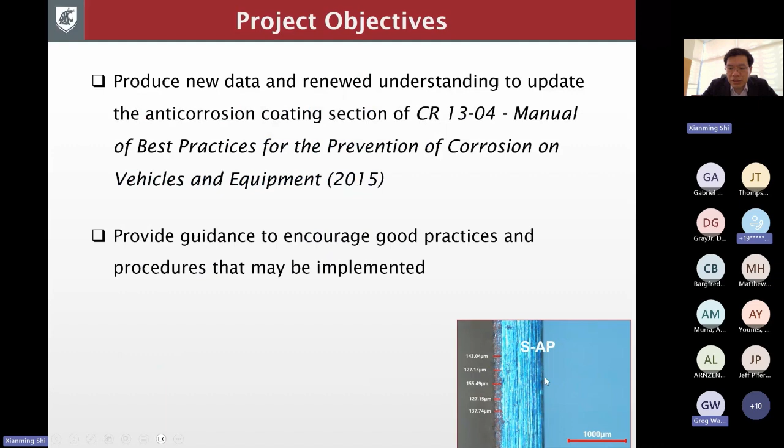Just to refresh our memory why we want to do this project, the project objectives are twofold. First, to produce new data and renewed understanding to update the anti-corrosion coating section of the previously completed project back in 2015, titled Manual of Best Practices for the Prevention of Corrosion on Vehicles and Equipment. The second objective is to provide guidance to encourage good practices and procedures that may be implemented by highway agencies. Here I show an optical photo of a coating, which is a sacrificial anode or zinc-rich coating, under the microscope.

This project has five tasks. Task 1 is survey and market analysis. To begin with, we conducted an online survey of Clear Roads member states so that we can capture practitioner insights and collect more detailed information, such as the use of current deicers, off-market anti-corrosion coatings being used, the typical metals in DOT equipment, and so on and so forth.

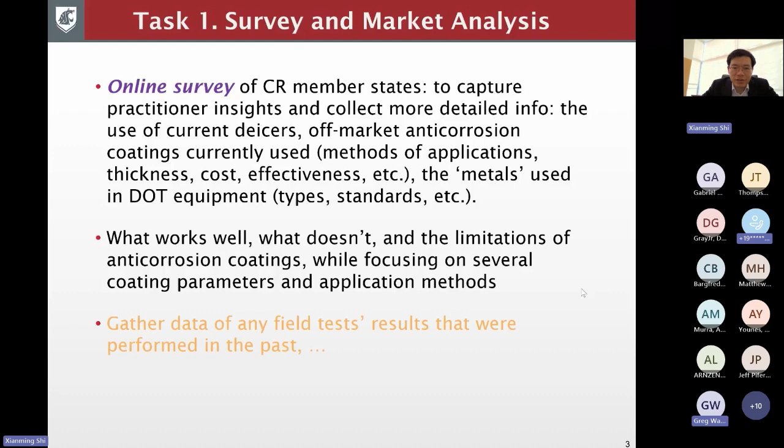We certainly want to learn what works well, what doesn't, and the limitations of such anti-corrosion coatings, with a focus on several coating parameters and application methods. Also, we intend to collect data of any sort of field test results, even though there's very little out there.

As part of Task 1, Task 1A is the survey, and we were able to obtain 23 complete responses. As you can see from the map, the location of these responding agencies is pretty diverse.

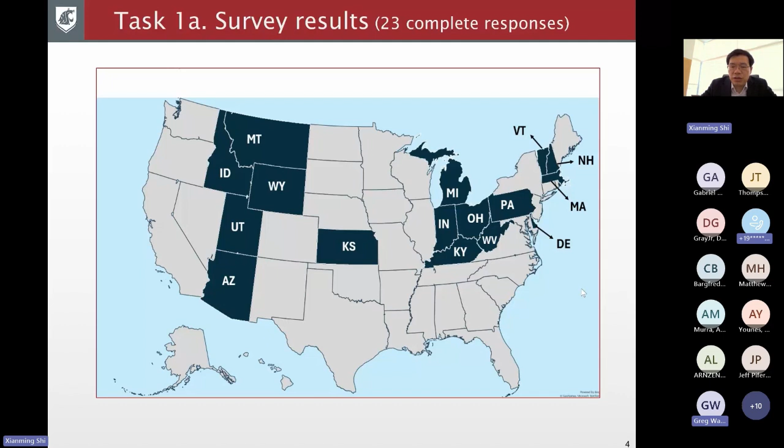From the survey results, you can see that we have a diverse group of responding agencies in terms of climate conditions, and pretty much everybody's doing anti-icing, de-icing, direct liquid application, and a little bit of sanding.

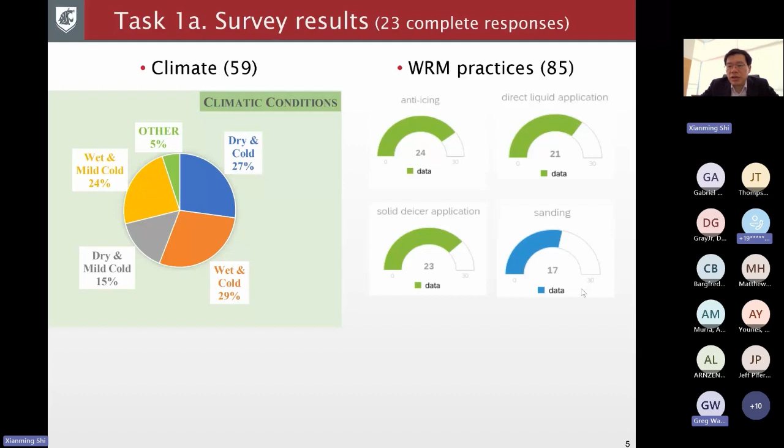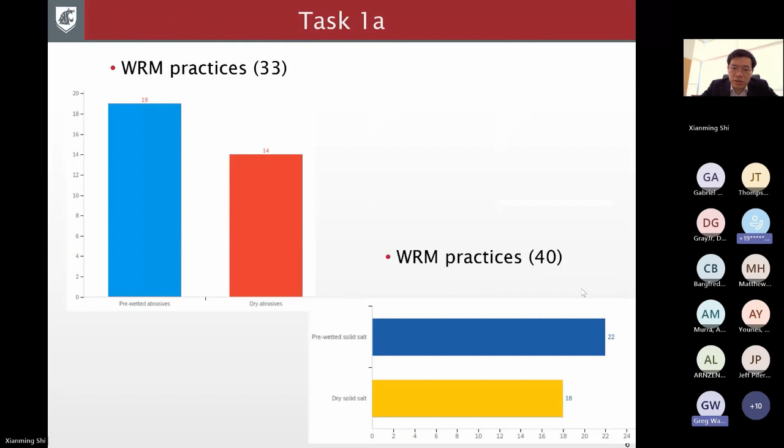Looking at winter road maintenance practices, there's sanding using pre-wetted abrasives versus dry, and salting or de-icing using pre-wetted salt and dry salt.

We also asked questions related to the use of corrosion inhibitors in these products. It turns out most agencies do use corrosion inhibitors in one way or another, and they mainly use beet juice and also inhibitors included with magnesium chloride deicers.

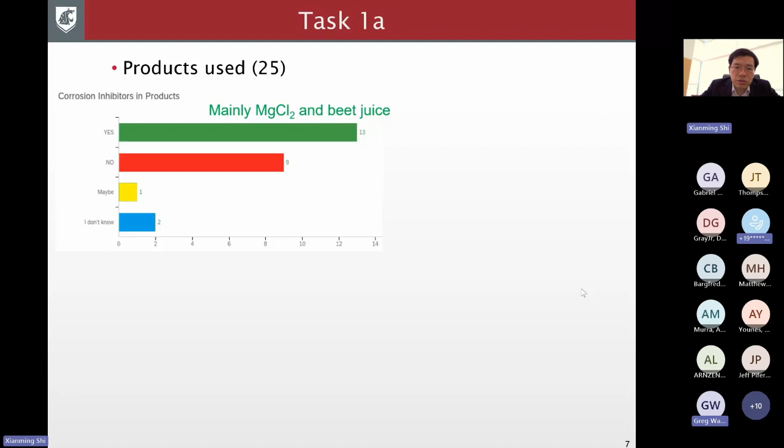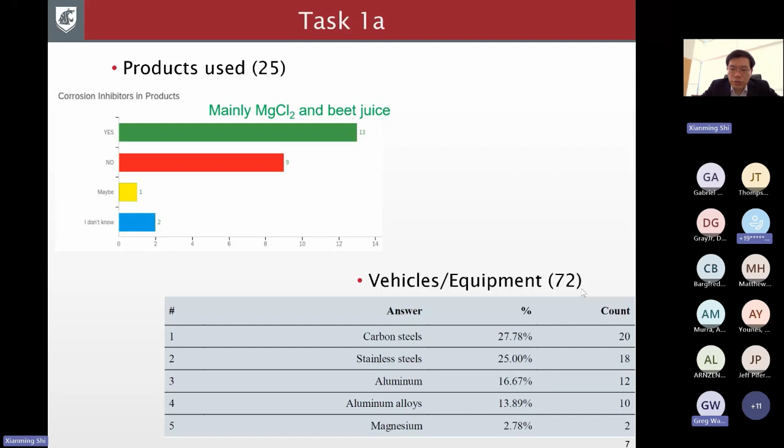We also looked at the type of metals typically seen in DOT equipment and vehicles. As you can see, carbon steels, stainless steels, and aluminum alloys are the more commonly used metals or alloys.

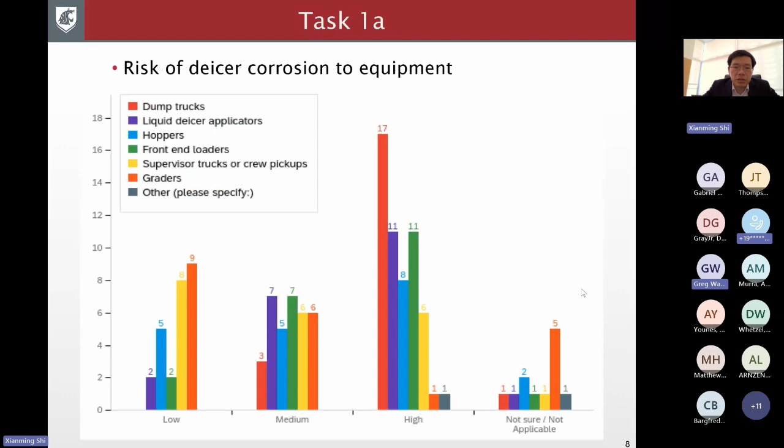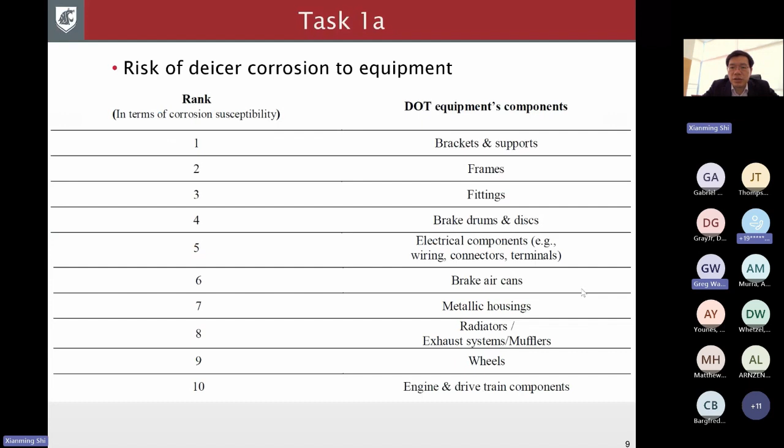Now, in terms of specific components - the previous slide was about the type of equipment, but this one shows the different components. You can see the highest risk or most susceptible to de-icer corrosion is brackets and supports, followed by frames and fittings, and so on.

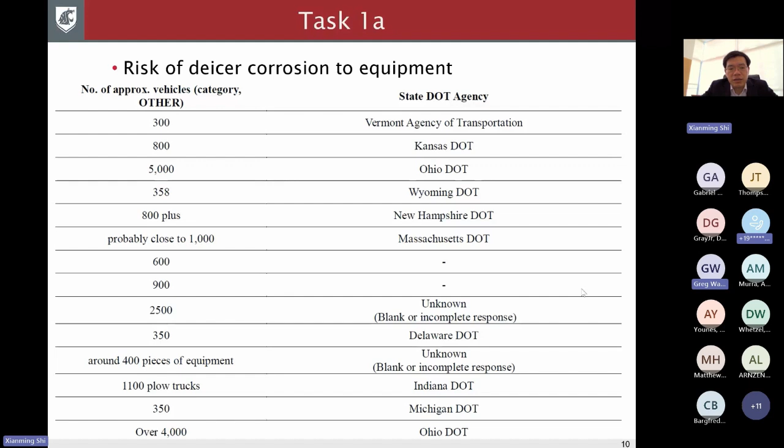We also looked into how many vehicles and how much equipment asset these responding agencies have, to get a better sense. Then we looked at the typical current practice, such as how frequently they replace a vehicle because of corrosion damage - it's about somewhat half and half.

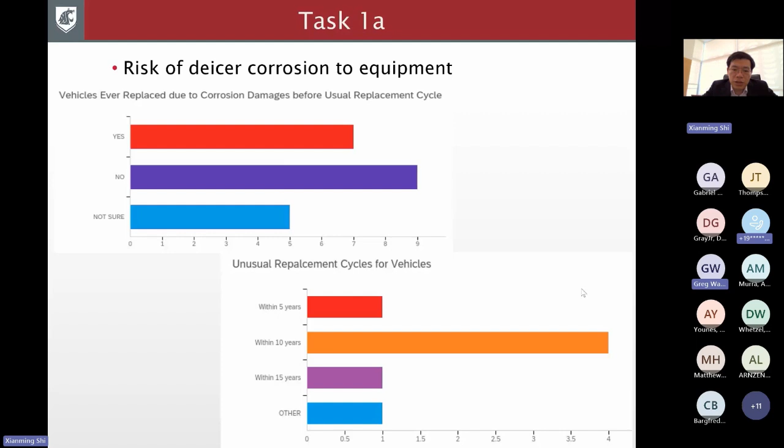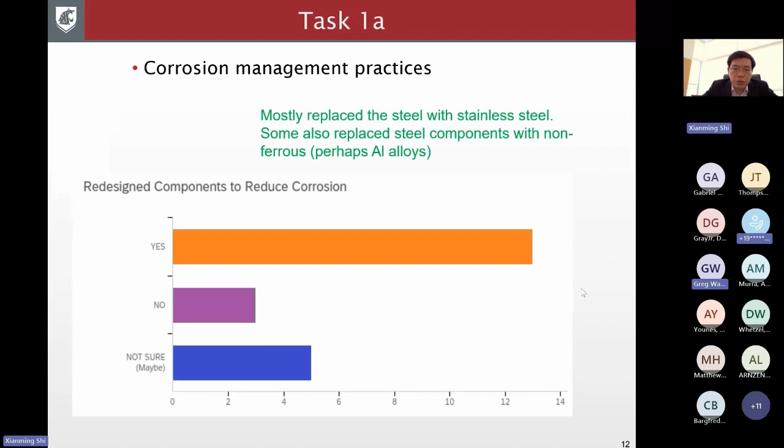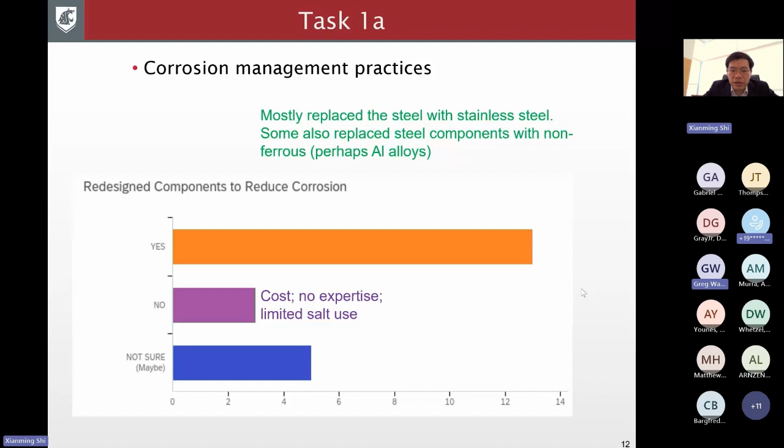And then replacement cycles, typically, you can see the vast majority of agencies end up replacing the vehicle within 10 years. If we look at the current practice of managing corrosion, most agencies do some practices such as replacing steel with stainless steel, and some replace it with non-ferrous metals such as aluminum alloys. The agencies who report not doing corrosion management say it's due to lack of expertise or funding, or they use very little salt.

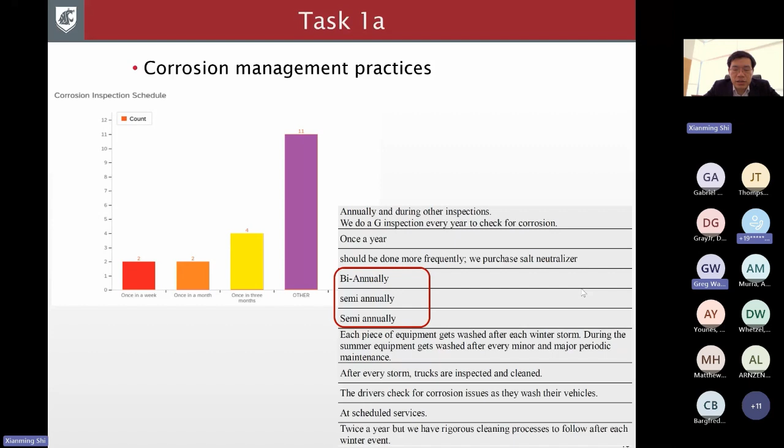Now, in terms of inspection, basically agencies tend to inspect every 6 months or so, the majority of them. So that's the current practice.

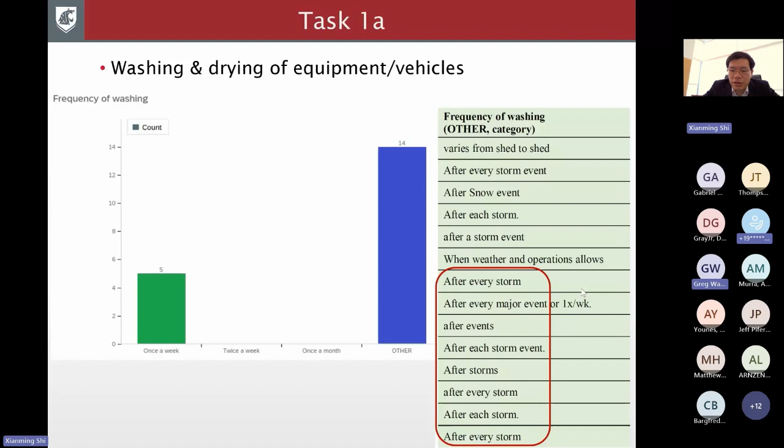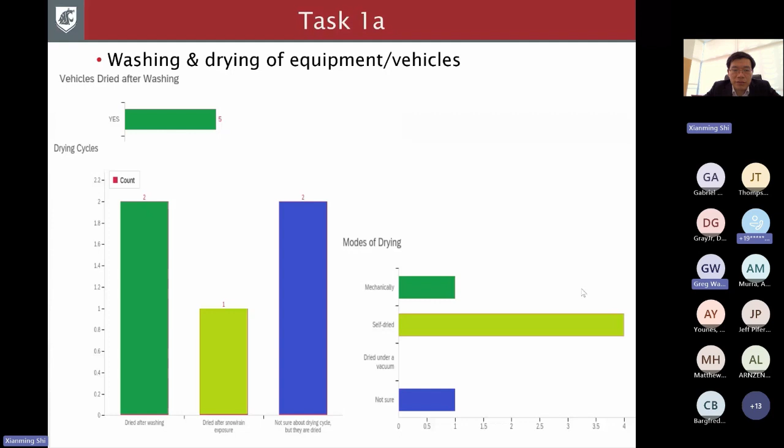Now, in terms of drying, actually most of them don't intentionally dry the vehicles. And for those who do dry the vehicles, the drying cycles are less managed, I guess, not really managed. Typically it's self-dried, not mechanically dried. The military, for instance, would have more facility to intentionally manage the drying of vehicles after washing, but highway agencies don't have that.

So when it comes to anti-corrosion coatings, at the time of manufacturing, they have various ways of applying the coating or paint. And aftermarket, or other than the OEM coating system, there are also practices of using coating or some sort of spray-on protection. But for those who don't apply additional coatings, there are various reasons, usually dealing with limitations of facility or staffing.

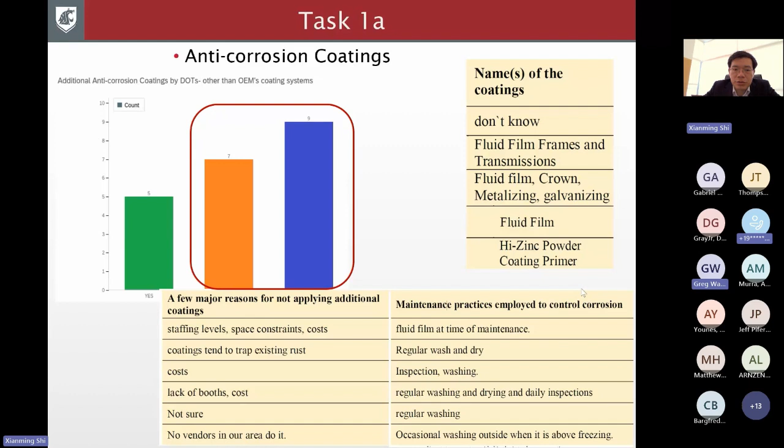As you will see later, fluid film is a product being mentioned over and over by various northern state agencies. But again, as you can see here, the majority of them don't do anything with coating practice after OEM because of these limitations.

Now, you already see fluid film mentioned a couple of times here. In terms of the type of coatings people use, coating is a somewhat loosely defined term. As you'll see later in the actual experimental program, we also included sealants and grease as a way of coating, and they do provide some level of corrosion protection.

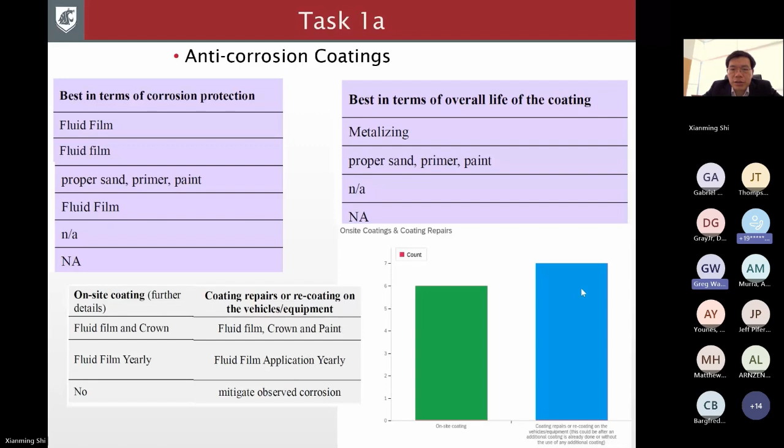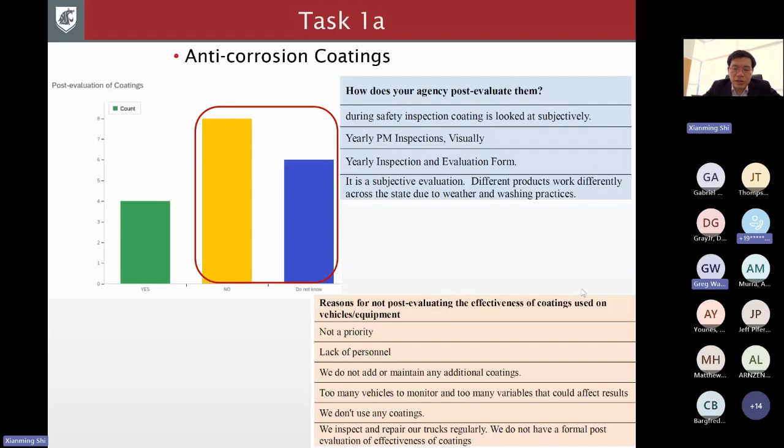So in terms of post-evaluation, we also collected some practitioner information or experience. Usually this is not a rigorous program applied to manage post-evaluation of coatings. We didn't really find any rigorous studies on field testing of anti-corrosion performance of such coatings. So again, most agencies don't really conduct post-evaluation.

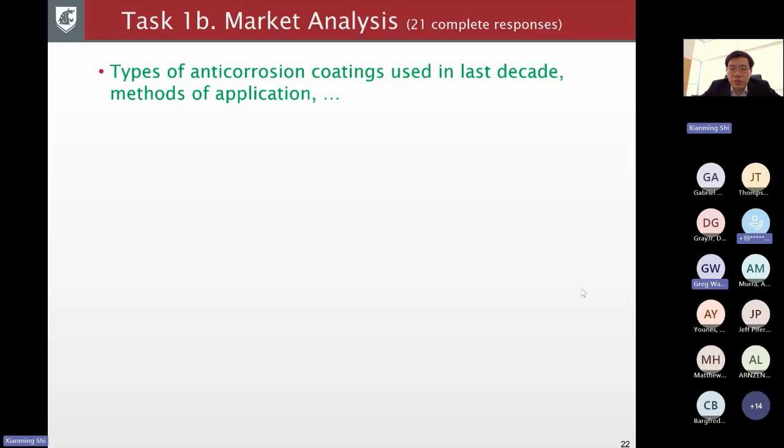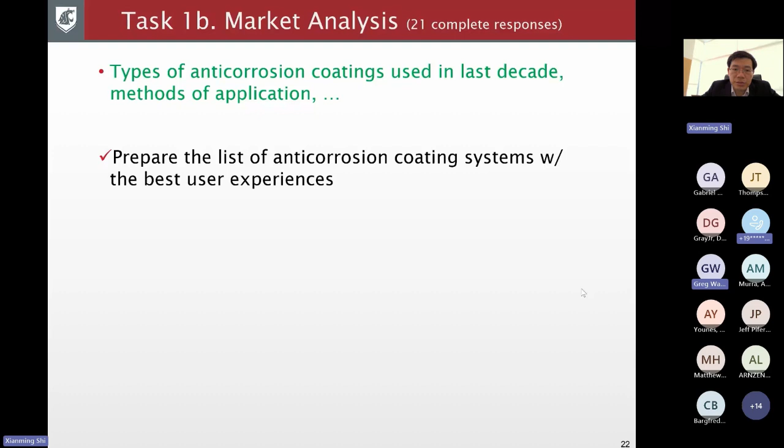Now, the second part of task one, task 1B, is the market analysis. In this case, we asked more specific questions related to anti-corrosion coatings, such as the types used in the last decade, the methods of application, and so on. That was intended to identify a list of anti-corrosion coating systems with the best user experiences and help agencies identify the optimum cost-effective coating system choices for their equipment assets.

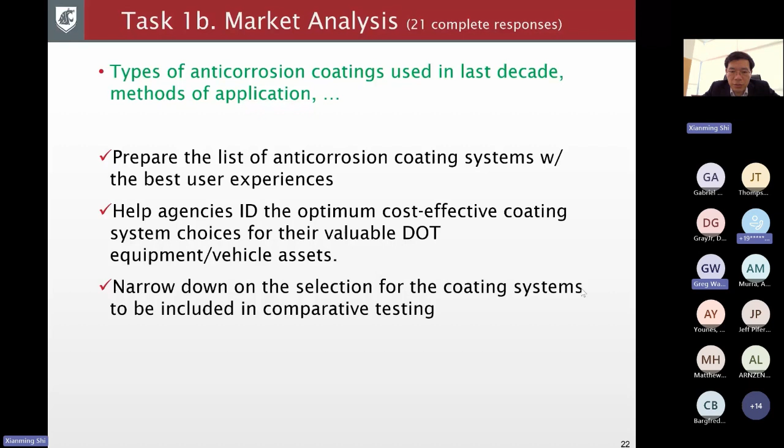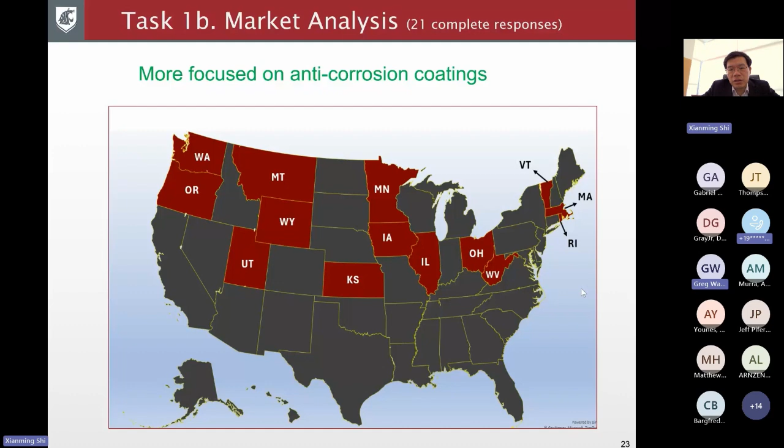So this helped us narrow down the list and prepare us for some rigorous laboratory testing under well-controlled conditions. The second survey basically had 21 complete responses, and you can see the locations of these agencies responding to the second survey.

Here, basically, we identify for different metal substrates, different coatings are used, and the most commonly used ones are, for instance, Lubra Seal, which is a product commonly used for stainless steel substrates, and then fluid film is often used for carbon steel substrates, and a number of products used for aluminum alloys or copper alloys.

Like I mentioned, some of these coatings are loosely defined, because dielectric grease in some other contexts would not be considered as a coating. And Armour Seal, for instance, is a sealant, which is not truly a coating, but in this project we have a more general definition of coating.

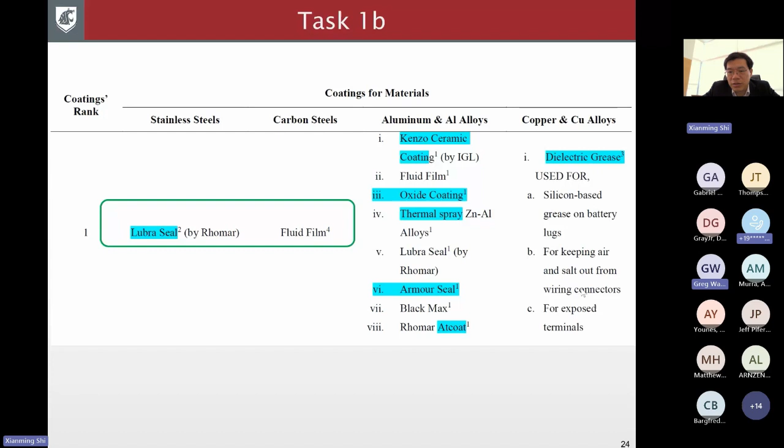So anyway, from the survey, we identified these most commonly used products. You see a small number next to the brand name. For instance, fluid film, we had 4 agencies reporting the use of it on carbon steel. Or dielectric grease, we have 3 respondents, so it's a more common practice.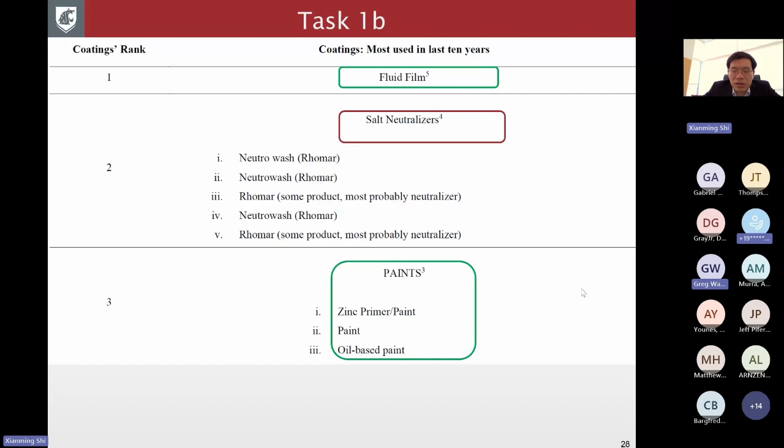They're more like a useful product to ensure better cleanliness of the metal substrate before you can put on any sort of coating or spray on any sort of corrosion inhibitor. So that's actually a little bit outside of the scope. And paints in this context of the project are considered as coatings.

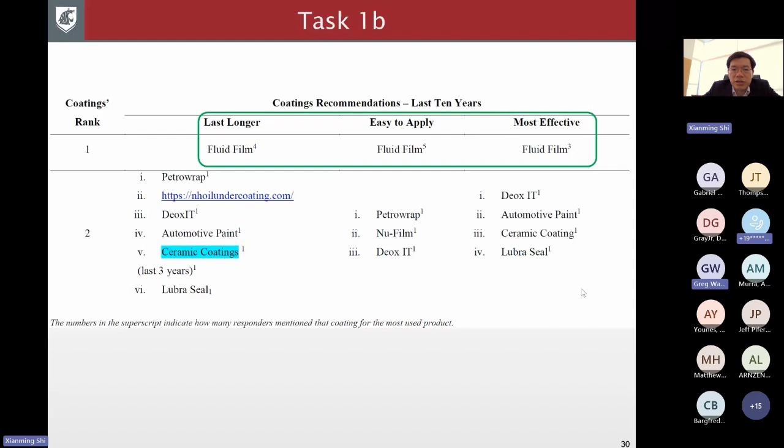Now we also look at what agencies would recommend as a good coating in terms of being, the coating should last longer, easy to apply, and being most effective. Again, you can see that fluid film is a clear winner from the positive user experience of these responding agencies.

So based on the survey results from task 1, we developed the experiment plan in task 2. As laid out in the scope, we were supposed to investigate at least 3 different metal types, 3 different coating systems, and 2 different deicer types.

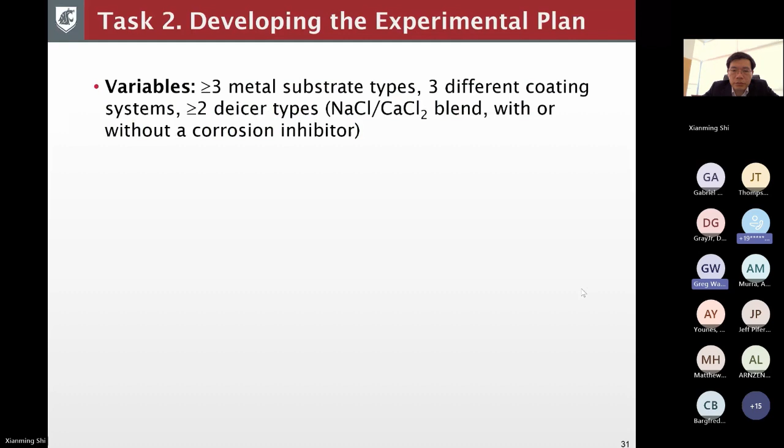So we end up choosing a blend of sodium chloride and calcium chloride, and another one is magnesium chloride with beet juice.

The fortunate thing is that there is a well-established lab testing protocol known as the salt spray test protocol under SAE J2334. This salt spray test protocol incorporates wet-dry cycles as well as exposure to salt, and previous research had shown that 60 cycles of this accelerated test is equivalent to about 5 years of on-vehicle testing. So with this accelerated lab test, one can greatly reduce the expense of outdoor testing. And maybe that is partially why we couldn't find any field testing results, because the SAE test protocol is pretty reliable. For each test, we typically use 5 replicates, except in some cases we use 3.

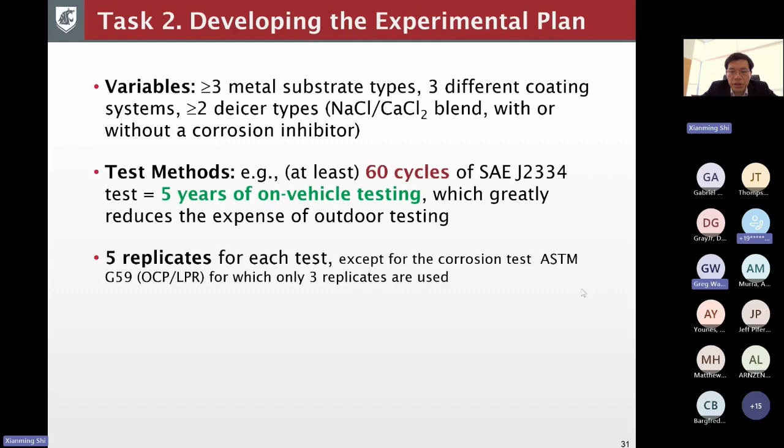So here is some more details. If you look at this table, on the left is the column on materials. We had 4 different metal types: steel, which is basically carbon steel, and then stainless steel, aluminum, and copper. And then for each of them, we select several coatings.

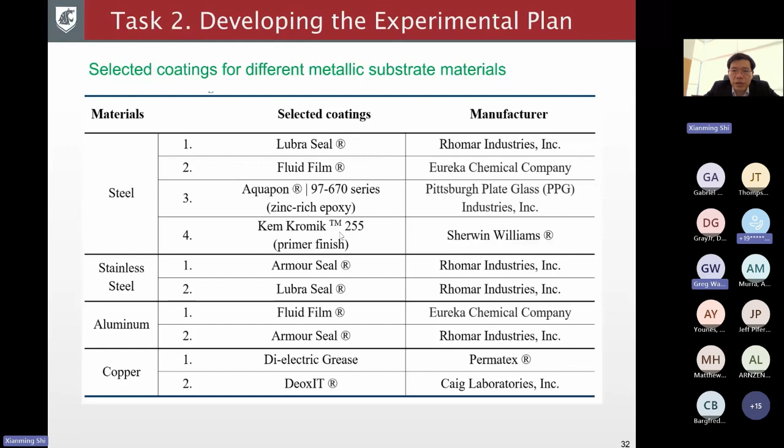As you can see here, this was the list, and then we further finalize this based on consultation with the project panel. And then here's a more detailed table with different test methods as a function of the coating type, the metal alloy type, and then again the different deicers we used.

For instance, in group 1 or series 1, we have used a non-destructive evaluation method called EIS, or electrochemical impedance spectroscopy, which gives a lot of mechanistic detail of how severe the corrosion is and why it's that way. And then the second series of tests is the salt spray test. Like I mentioned earlier, it corresponds to field performance really well, so that's fortunate.

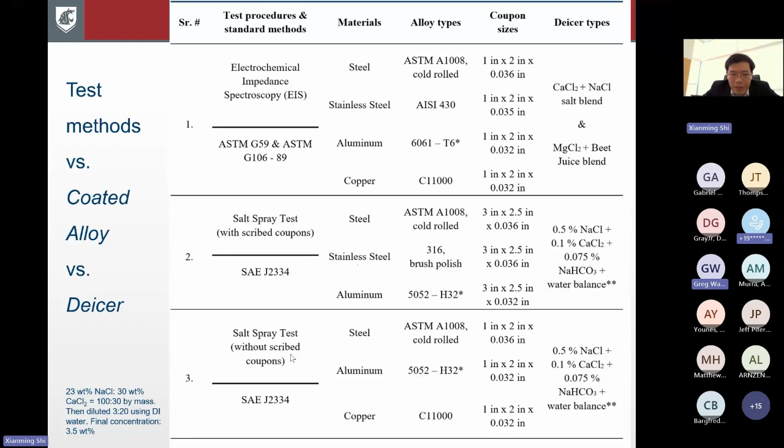In this case, for the salt spray test, series 2 is with the scribed coupons. Basically, you have an X marked on each coated coupon, and series 3 is without the scribe. Especially in some cases, the coating is too soft, or like just a grease, there's no easy way to do that scribe. So depending on the situation, there's a little bit of deviation from this scribing procedure.

And then as a coating on vehicles, sometimes it's really important to ensure the adhesion, so we also test the adhesion and test the hardness. For instance, if it's underbody coating especially, the coated surface may experience some abrasion by abrasives or sand, so a hard surface will be preferable. We tested hardness, and there are 2 tests: one is a pencil hardness test, but for the even harder coatings we end up using the Vickers hardness test.

So we also had some naming convention to simplify the figures. As you can see here, for instance, if we have a figure later that shows S-LS, that means we use the steel substrate and Lubra Seal as the coating, and so on and so forth.

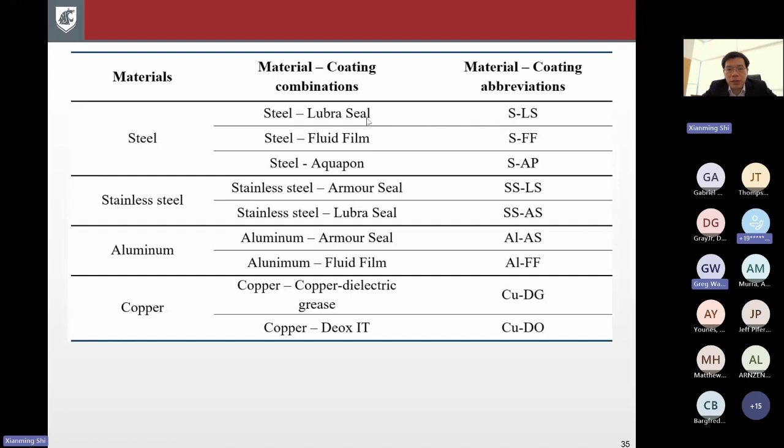Task 3 is really the execution of the experiment plan approved by the project panel. And like I mentioned earlier, the first test is a non-destructive test called EIS, which gives us a lot of details or insights about what's really going on at that coated surface.

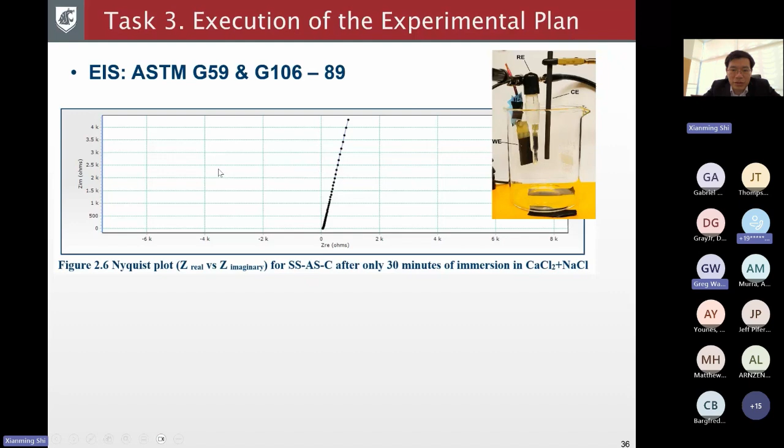Basically, the way it works is you have a metal coupon coated working as a so-called working electrode, or WE, and then you have a reference electrode next to it, and then you have a counter electrode. Between the counter electrode and working electrode, you apply a potential usually, and then you get a current feedback. These are AC currents, or alternating currents. And from the potential to current relationship, you can derive the so-called impedance spectroscopy. There's a lot of details about this method, but I won't go too much into it.

Basically, what we find in the end is, from these figures you obtain from the EIS test, you can analyze the interfaces. For instance, here you see a combination at the top, a combination of capacitance and resistance.

This is a simulation, or so-called equivalent circuit, of the coated metal surface. The first resistance is basically the resistance of the solution, the de-icer solution. And then the second combination, which is capacitance and resistance, is basically an indication of the coating to de-icer solution interface.

So that coating soaked with de-icer becomes a non-perfect capacitor, and it has its own resistance. Then there's another combination of resistance and capacitance, where the capacitance is a so-called Warburg diffusion. This Q is another kind of capacitance, and this W is a Warburg diffusion resistance. Anyhow, these things tell you how fast corrosion is occurring at the metal to de-icer interface.

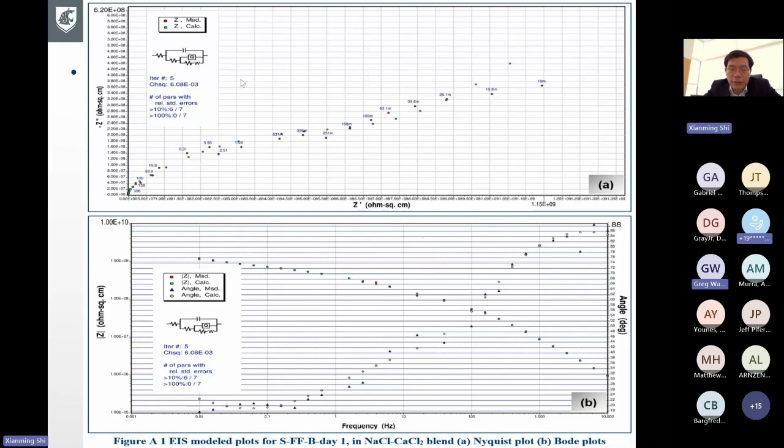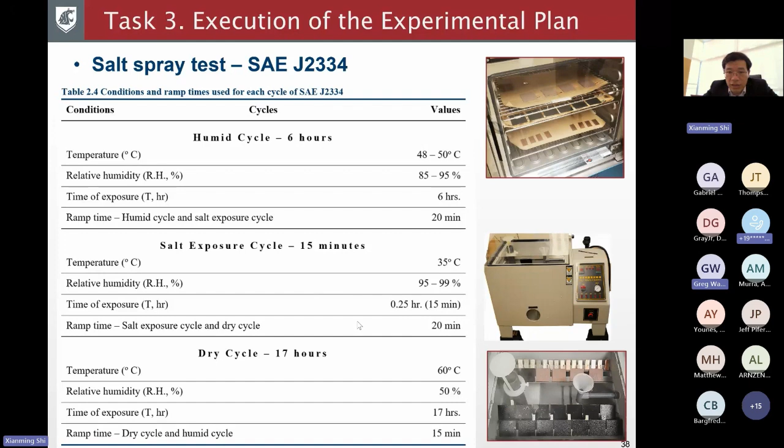So the second type of test, as I mentioned, is the salt spray test, standardized by SAE, the Society of Automotive Engineers. As you can see, there are different cycles: a humid cycle for 6 hours, a salt spray cycle for 15 minutes, and a dry cycle for 17 hours. These are conducted at different relative humidity, temperature, and time duration.

So this is just another way of summarizing this. Fortunately, there are prior studies demonstrating this kind of accelerated exposure corresponds well to the field performance of coatings. Again, some of the coated metals were abraded, some were not.

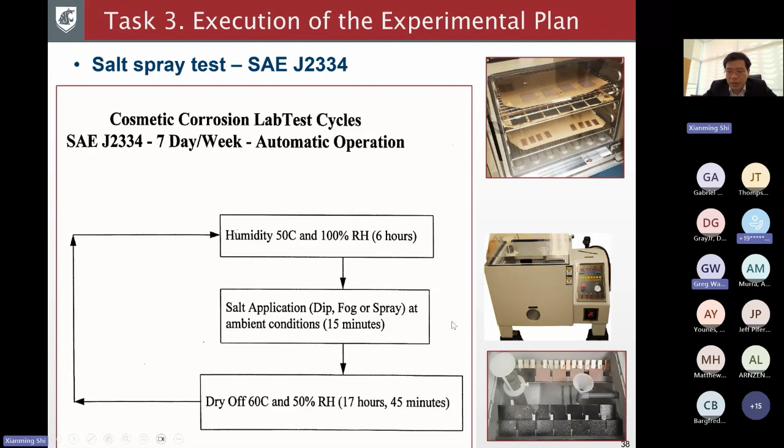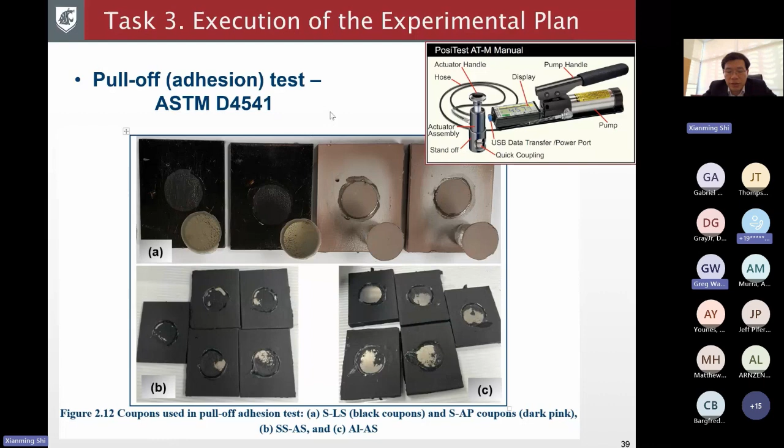Yet another set of tests was the adhesion test, basically a pull-off test to measure the adhesive strength of the coating to the metal. And then another one is the pencil hardness test and the Vickers hardness test, which is for really hard surfaces. Basically, you measure how big the dent is when a 1 kilogram force is applied onto that surface for 15 seconds.

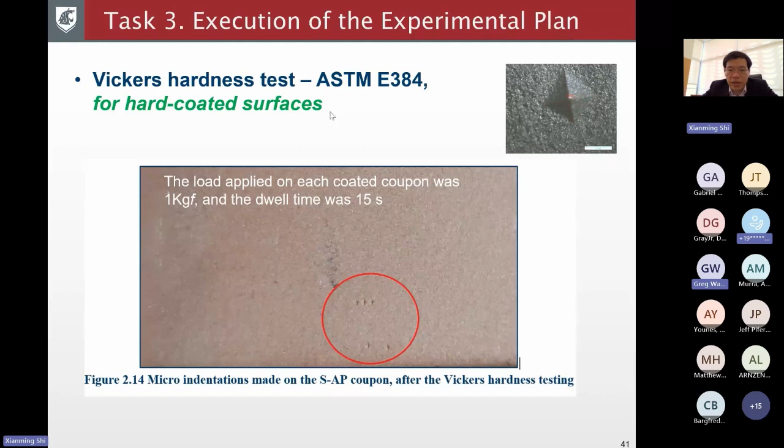And again, we have hundreds and hundreds of these EIS results, because at different times over 31 days we measure them periodically. This gives us a lot of insight in terms of how the coating deteriorates and how the corrosion propagates, or initiates and then propagates.

So this is just one example: a steel coated by Lubra Seal, in this sodium chloride and calcium chloride mixture de-icer, at day 30. This is all the EIS results, and then we can derive these parameters.

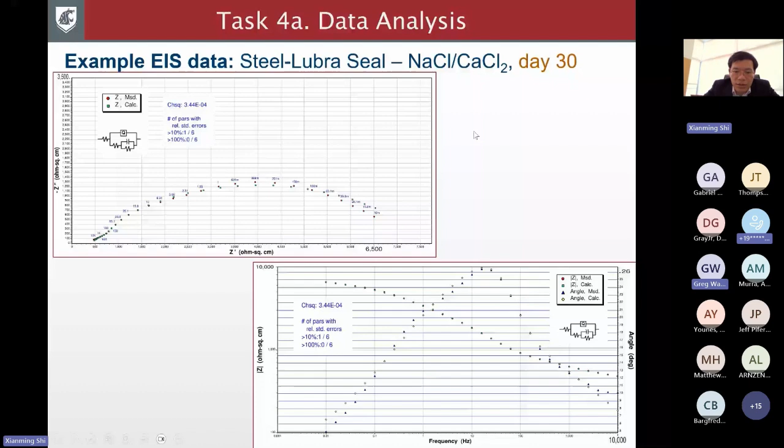Again, the most important thing we want to look at here is RPO, the pore resistance. Basically, the coating under a microscope is highly porous, even though with our naked eye it looks very impermeable. So the de-icer penetrates and saturates that coating, and over time this resistance drops, which is an indication of the coating failing itself over time.

Now, another parameter is this charge transfer resistance, or polarization resistance, which is the resistance of the metal to de-icer corrosion. So the higher the resistance, the better the metal is resistant to the de-icer attack.

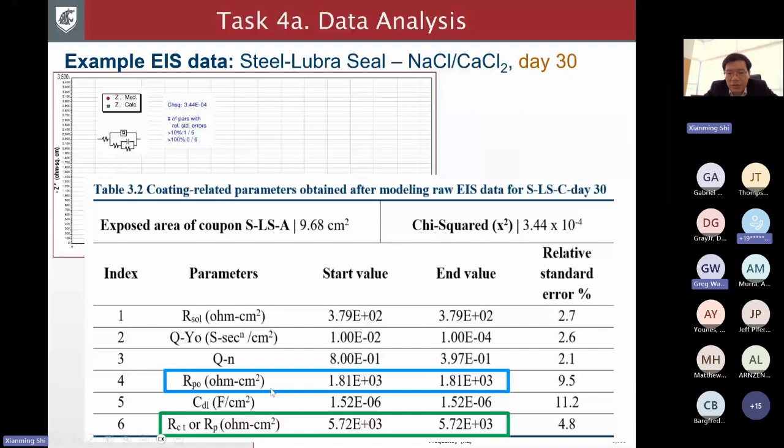So if we consider we need a coating which gives really high pore resistance both at day 1 and day 30, then the best product we found was fluid film for the aluminum substrate. Following that is Aquapon, which is a zinc-rich epoxy primer for carbon steel. Then Lubra Seal on stainless steel, and then Deox IT for copper substrate. This is only for the sodium chloride, calcium chloride salt blend.

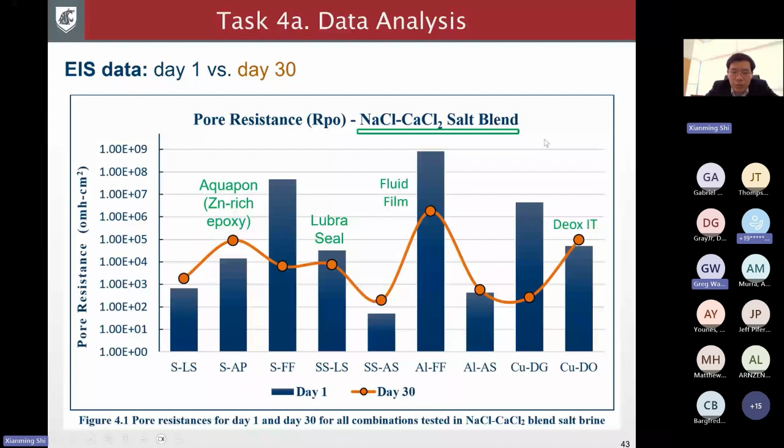If we look at the magnesium chloride beet juice blend, it's somewhat similar. You see some clear winners like fluid film — again for both aluminum and carbon steel substrates — and then Lubra Seal for stainless steel substrate, and dielectric grease for copper substrate.

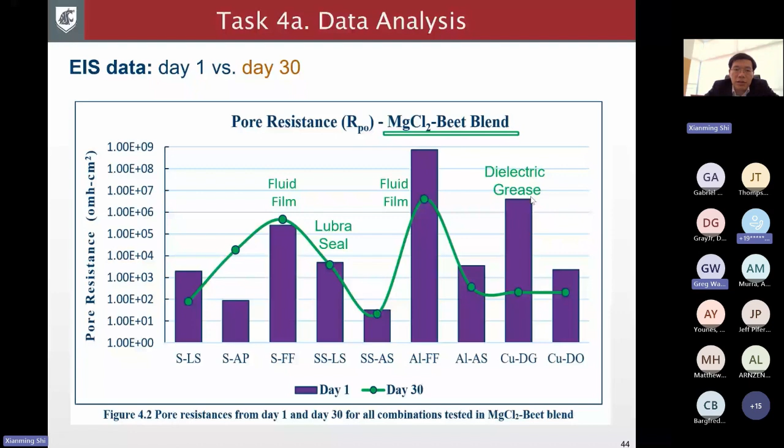With such information, we can rank the different products. For instance, for steel, the best products are AP, FF, LS, Lubra Seal, fluid film, and Aquapon. For stainless steel, it's Lubra Seal and Armour Seal, and so on. These rankings are different for the two different types of de-icers.

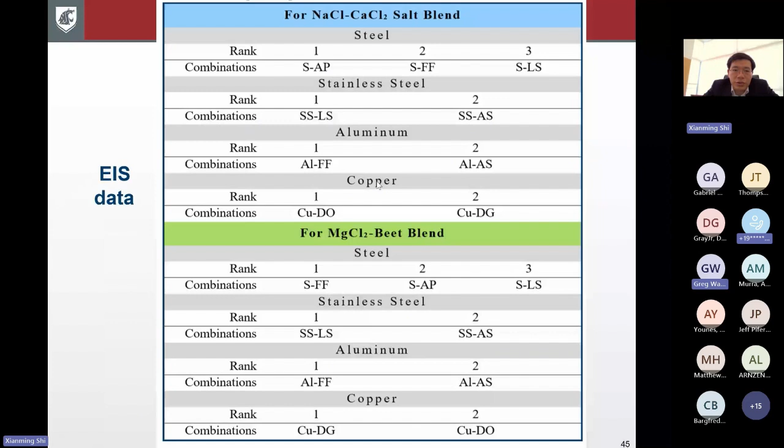If your vehicles are exposed to both types of de-icers, we have to consider both. The good news is for the cyclic salt spray test, most coatings pass. By the end of 60 cycles, equivalent to 5 years in the field, they do really well. You don't even need to reapply them every 5 years, though in practice most agencies reapply every 3 to 5 years just to be safe.

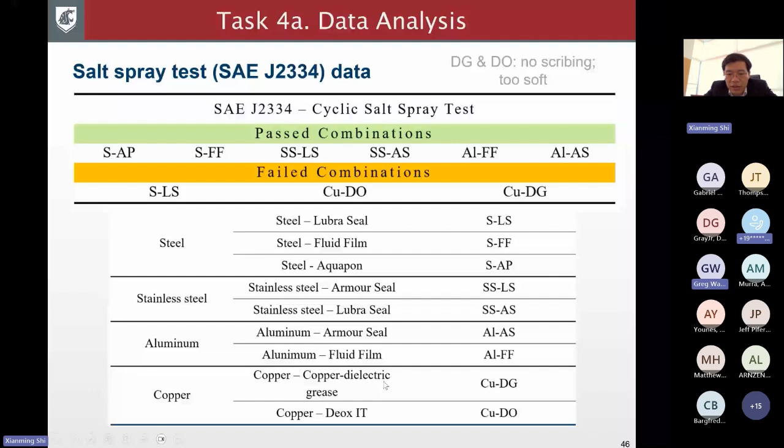But a few samples failed the 5-year test, for instance the Lubra Seal on carbon steel surface. Again, Lubra Seal is a sealant, so it's not intended to be a long-lasting coating anyway. Also the dielectric grease and the Deox IT are two lubricants, and again, they're not intended to be anti-corrosion coatings, so they didn't really pass that 5-year, 60 cycle test.

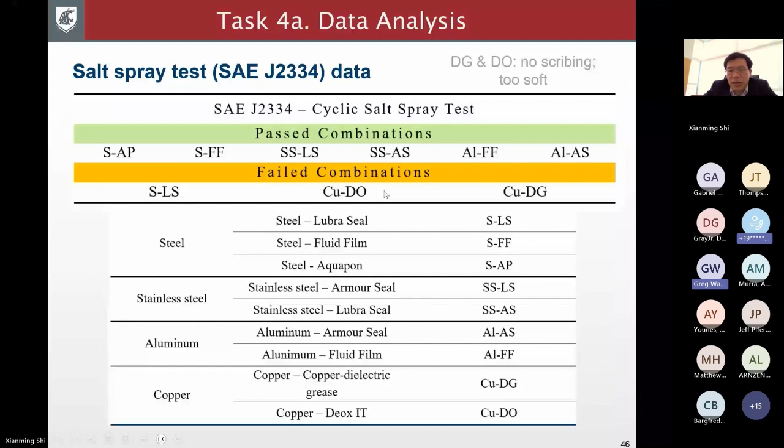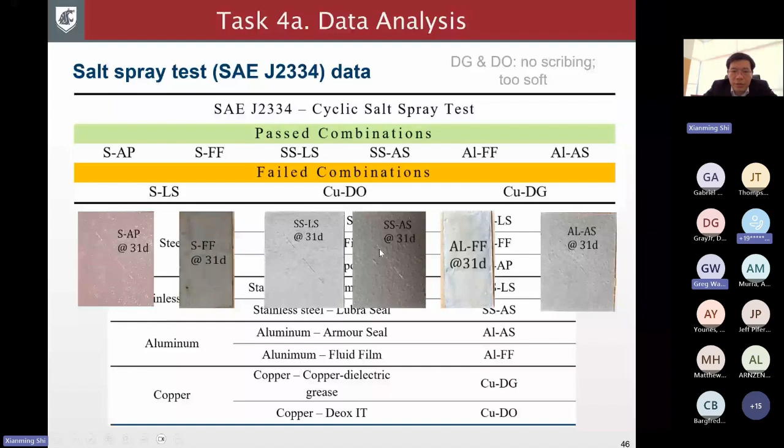Then we use software to quantify the percent of rust area, and also rate the creepage, which is another indicator of how severe the coating is failing. Again, fortunately, most coatings worked well.

As a summary of the data analysis, looking at the adhesion test, Aquapon, which is the zinc-rich primer, showed the highest adhesion strength. Keep in mind Lubra Seal or Armour Seal were just sealants, so not very strong coatings. The Aquapon adhesion strength on average was more than 1,400 psi, while Armour Seal on aluminum or stainless steel was around 400 to 500 psi.

For the Lubra Seal, one challenge was the glue didn't work well on the substrate, so we couldn't get good results.

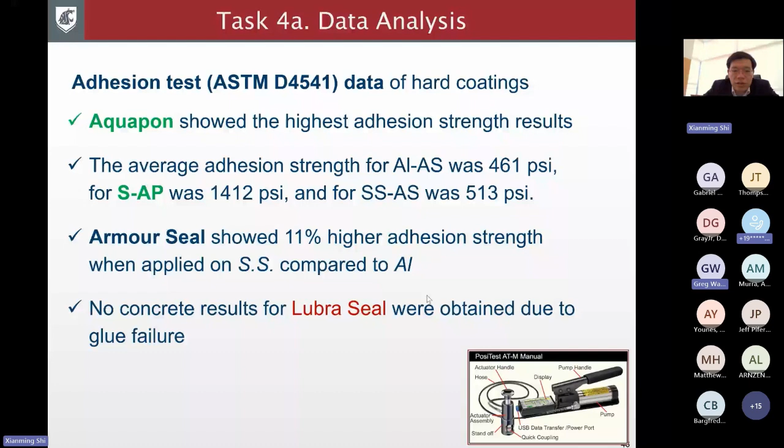In terms of pencil hardness test, the vast majority of the coatings were just too soft. The only exception was this sacrificial anode, brand name Aquapon, which is zinc-rich epoxy primer and sufficiently hard. In fact, we had to add additional load to measure its hardness with the pencil hardness test, otherwise it would be too hard to measure.

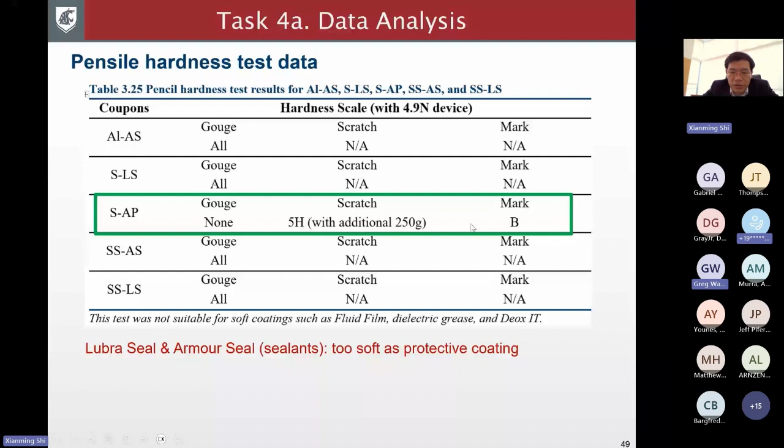This is no surprise because it's very much a zinc-rich primer, so its hardness is similar to a galvanized surface. To conclude, the abrasion resistance and resistance to scratch and indentation of Aquapon is much higher than any other tested product. Also, because it's zinc-rich, if you have a scratch, the zinc is supposed to pump electrons towards that defect, so it has self-healing properties. This can reduce the cost of reapplication, but this product has higher initial cost, around $225 per gallon, about 400% higher than fluid film. And because it's a traditional coating, it requires very rigorous surface preparation of the metal surface.

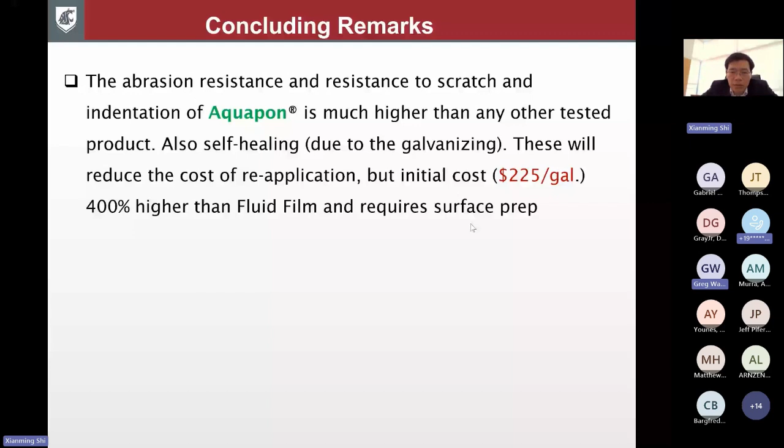On the other hand, fluid film is lightweight, inexpensive, versatile, and doesn't require very rigorous surface preparation of the metal. One lesson learned is also to keep the vehicles dry when not in use, after being washed, so there's no residual salt. That could extend the service life of the equipment assets.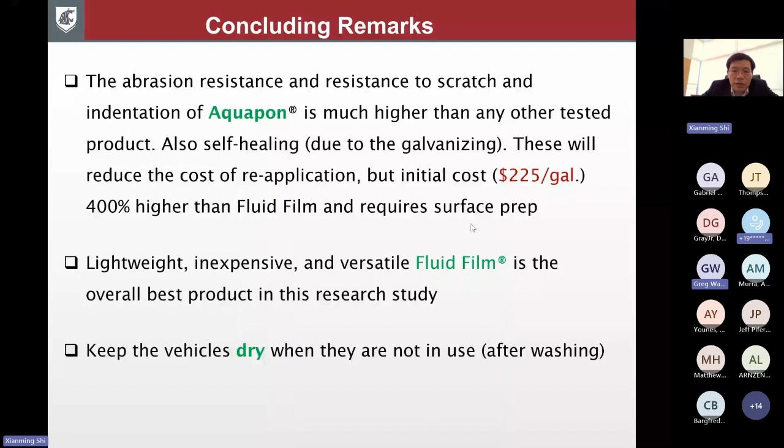From the data analysis, we also prepared some comparison charts for the tested products. Just a few highlights: fluid film has a lot of advantages, no really rigorous need for cleaning or surface preparation, while Aquapon requires serious, rigorous surface preparation. But for Aquapon, one benefit is it could easily last 3 to 5 years without any reapplication or repair.

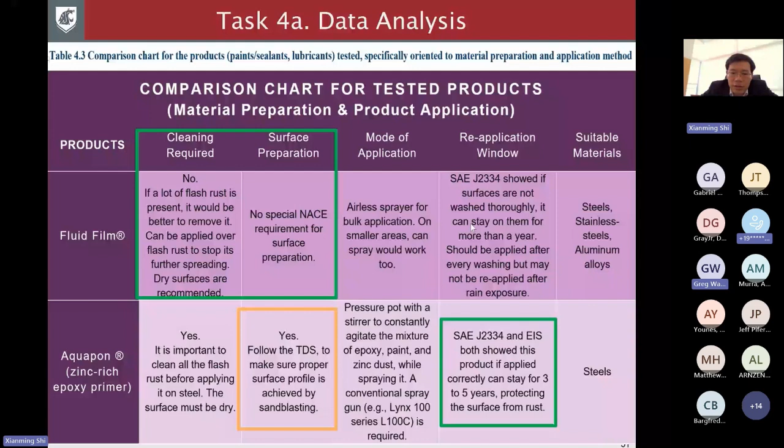Now, for the sealants, Lubra Seal versus Armour Seal, Armour Seal worked better, especially for the surfaces tested, like aluminum alloys and stainless steel. It can last 3 to 5 years, in other words it passes the cyclic salt spray test. But for Lubra Seal, the service life is only about 6 months on steel.

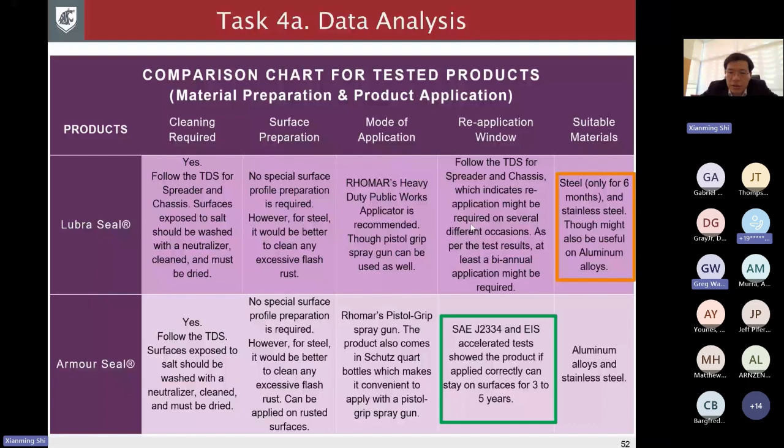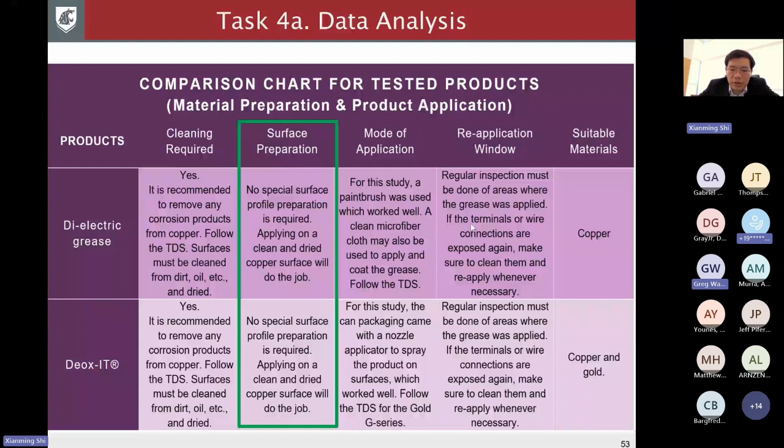For the dielectric grease and other lubricant, the benefit is you don't need special surface preparation, but the downside is they both fail the 5-year test, so you need to reapply whenever necessary. For Aquapon, one significant benefit is its abrasion resistance and self-healing properties. For fluid film, it's just a different type of application - no need for rigorous surface preparation, and it's actually quite surprising that we find it able to pass this 5-year test.

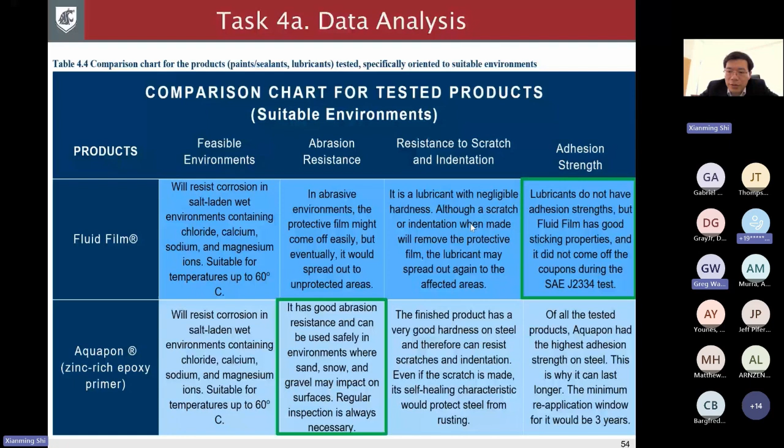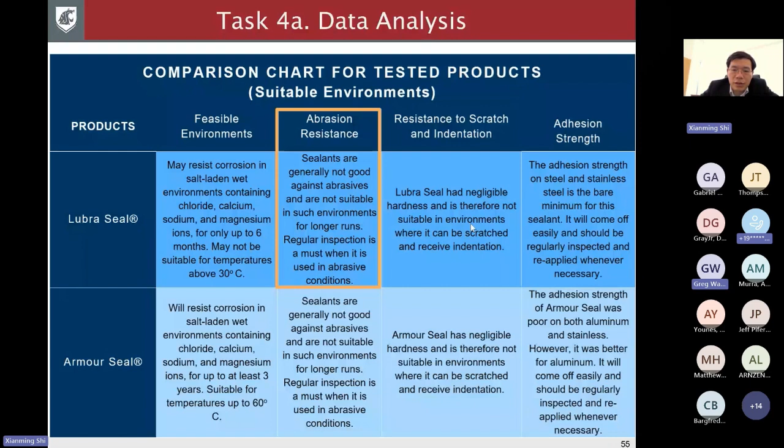Now, again, for the sealants, they're not designed to be abrasion resistant, so you basically cannot trust them for underbody applications. For the lubricants, again, they're not supposed to have abrasion resistance, but since they can easily creep into adjacent areas, it's a different kind of product than the traditional coatings.

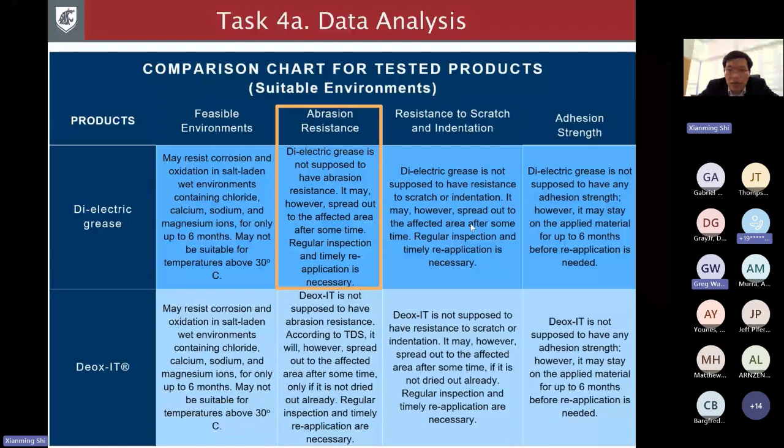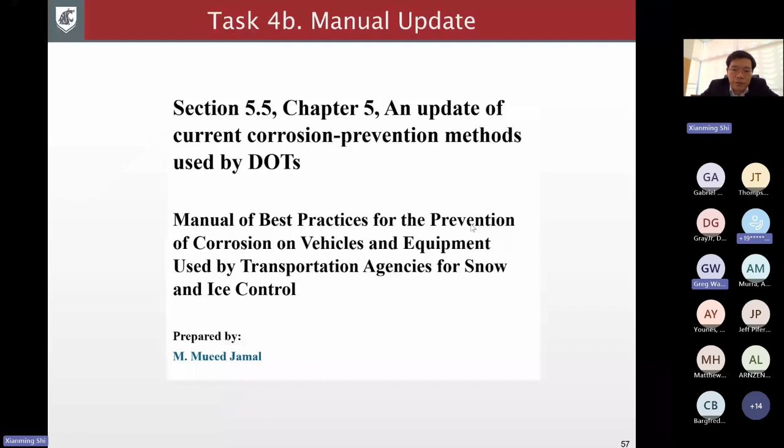So with this kind of information, both from the survey analysis and the rigorous laboratory testing, we were able to update the manual, especially for the section intended to be updated. So again, it's more a repackaging of the information in a more user-friendly fashion. I won't repeat this, but...

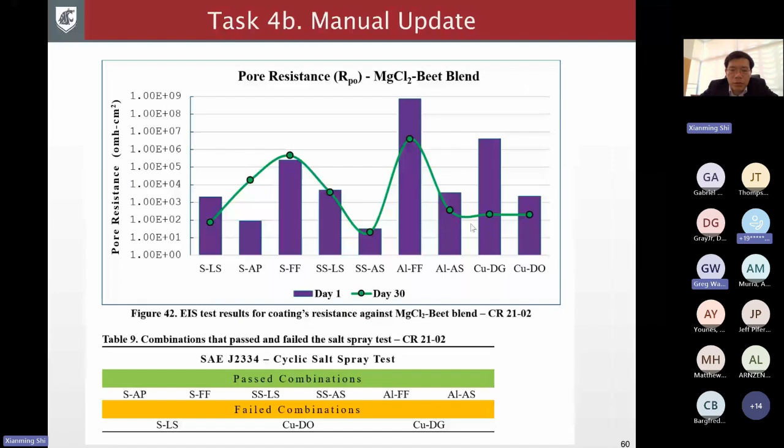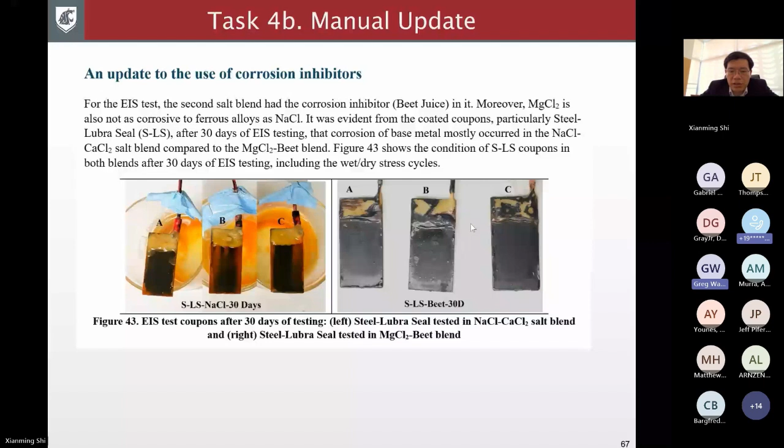One interesting thing is that we also updated a small section on the use of corrosion inhibitors, because it seems like the products with the beet juice tend to have much less rust on them. And even for the copper coupons, it's also showing the same phenomenon - the benefit of having corrosion inhibitor incorporated with the deicer. But of course, there are spray-on corrosion inhibitors for the vehicles themselves, but again, that's outside the scope of this project.

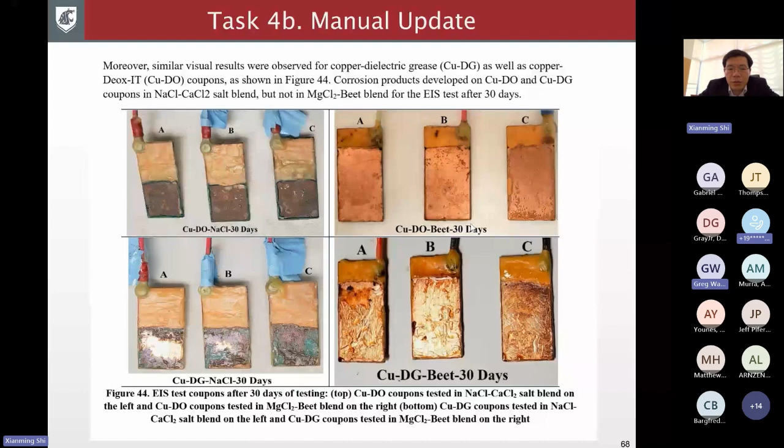We also added a few things or updated a few things on washing and drying. And that's all. I welcome your questions. Let's see.